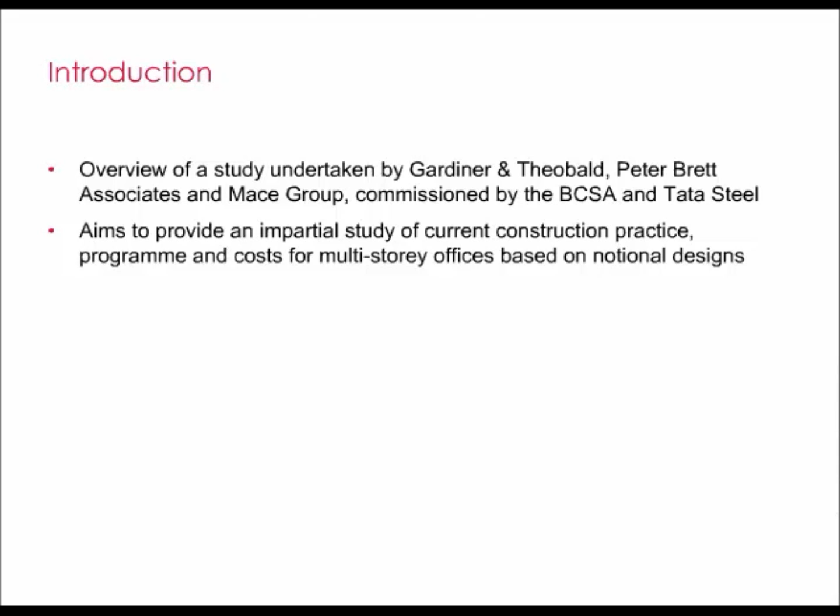Two typical office buildings will be considered: Building 1, a low-rise out-of-town business park office building, and Building 2, an 8-storey city centre office building. We'll go into a bit more detail later on those.

As decisions on frame material and configuration will be based on a number of factors, the structural characteristics, programme and buildability implications of each of the framing options will be considered alongside the cost implications of each. In addition, the cradle-to-grave embodied carbon implications of each of the framing options will also be considered for Building 2 only.

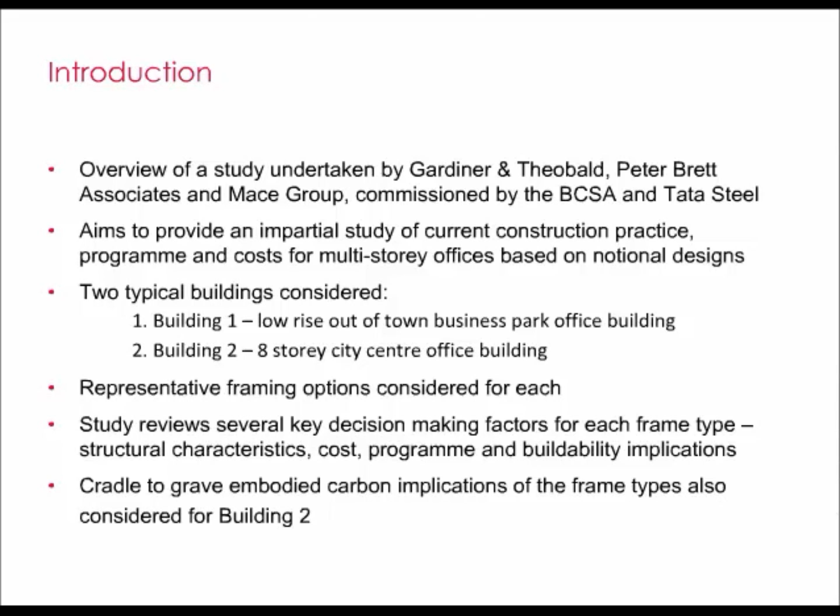The first building we will consider is a typical speculative 3-storey business park office building with a gross internal area of around 3,300 square metres, plus a rooftop plant enclosure. It is representative of a low-rise building in an out-of-town location and is rectangular with a floor plate width of 18 metres to provide open-plan internal space, as shown in the indicative cutaway and architect's impression images.

The clear floor-to-ceiling height has been set at 2.8 metres, and the building contains one central core, 2 lifts, and an external metal escape stair.

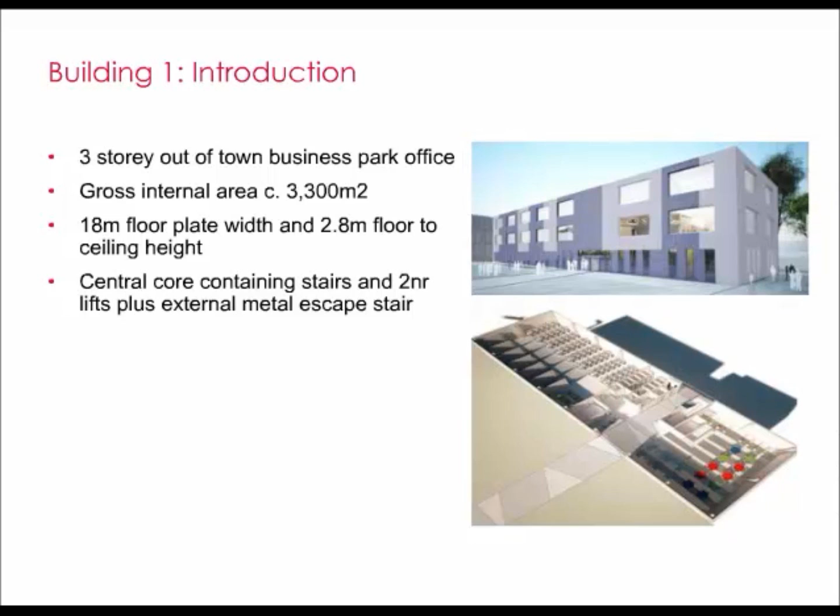The external envelope has been assumed to be brick outer skin construction supported by a steel angle off the slab edge, with an inner leaf of cold-rolled steel metal framing built directly off the slab, with an allowance for windows at 35% of the facade area.

The building has been assumed to have mixed-mode ventilation, and the floor-to-floor heights include for a 150mm ceiling and lighting zone and a 150mm raised floor zone.

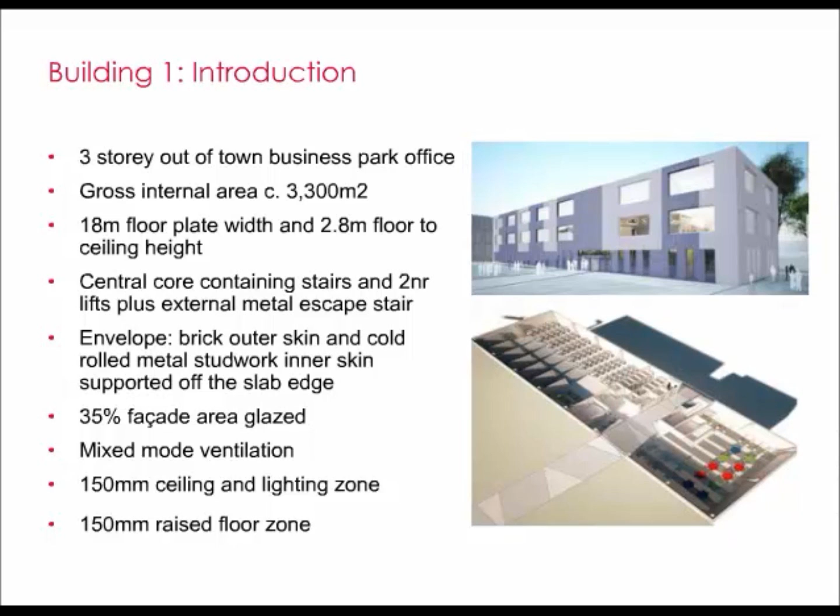As Rachel mentioned previously, the building was designed to represent a typical office that you might find in an out-of-town business park, being 3-storey with an area of 3,300 square metres and overall planned dimensions of 60 metres by 18 metres. We chose to use a design grid of 7.5 metres by 9.

Primarily because it's a common grid in this type of building, and although a 7.5 metre square grid is also common, there's a lot of previous cost data on that grid size which we didn't want to replicate here. That grid size also lends itself to open plan office layouts.

It provides good natural lighting and also helps to achieve natural ventilation, although it is on the upper limit for that. As far as structural options were concerned, we chose 4 of the most common options used in office buildings.

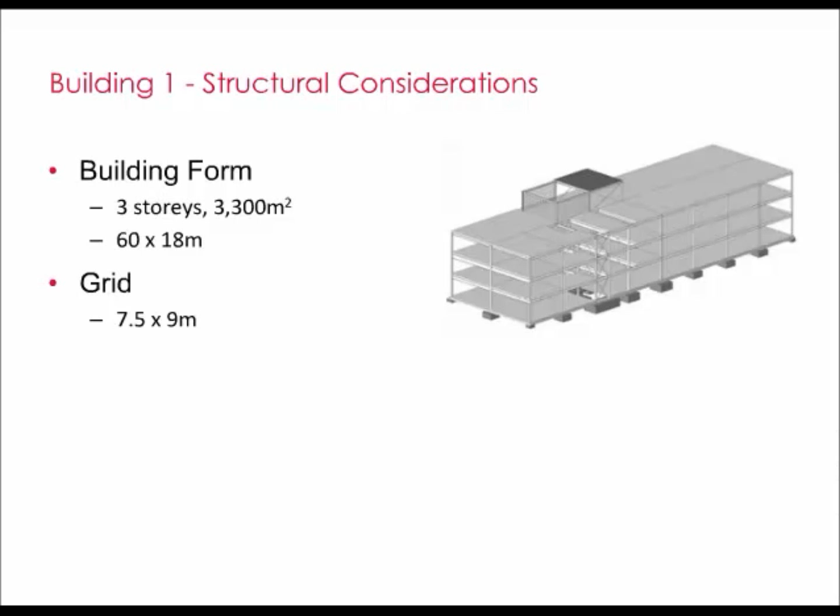These were steel composite beams and composite slab, steel frame with precast slabs. Option 3 was reinforced concrete flat slab, and the 4th option was a post-tension variant of the flat slab.

So these 4 options were taken forward and designed in enough detail to enable costing and programming of the construction.

In terms of loadings, for superimposed dead loads, we assumed a raised floor for power and data distribution, along with suspended ceilings and services, giving a combined superimposed dead load of 0.85 kilonewtons per square metre.

Imposed loads were assumed at 4 kilonewtons per square metre for office areas, with an allowance of 1 for partitions. And although BCO loads are lower at 2.5, many offices still use the higher loading to ensure flexibility of future use.

In terms of stability, core construction was assumed to be steel cross-braced framing with blockwork infill for the steel-framed options, and concrete core walls for the in-situ concrete frames.

Foundations were assumed to be pad footings with a bearing pressure of 200 kilonewtons per square metre, and ground-bearing slabs were assumed throughout. For services, the ventilation system was assumed to be mixed mode, where natural ventilation is supplemented by mechanical ventilation during periods of high or low temperature.

Steelwork solutions assumed a 300mm minimum service depth beneath the beam, and the concrete flat slab options assumed a 600mm clear zone beneath the slab.

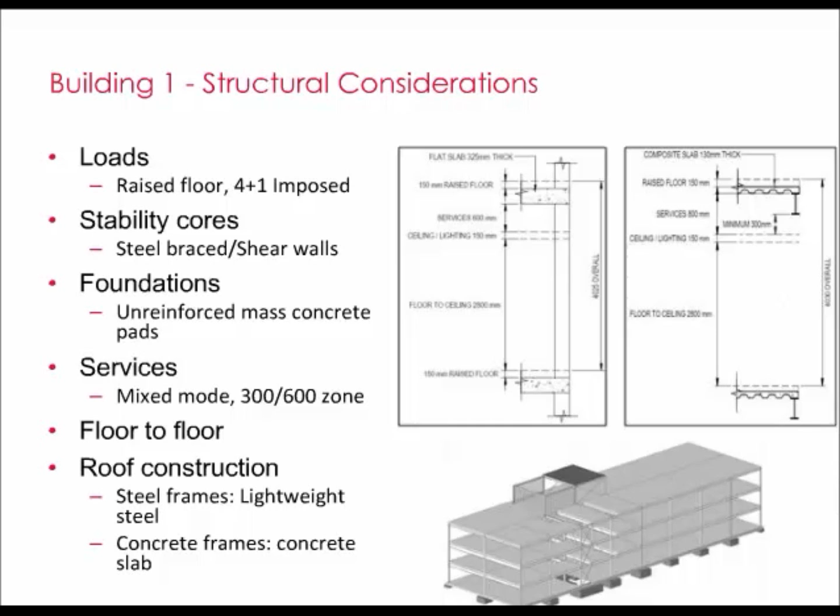In terms of results, I won't go into details of the steel sizes or slab depths, but I'll look instead at the impact on floor-to-floor heights. The steel composite option came in at a floor-to-floor height of 4,030 millimetres, virtually identical to the concrete flat slab at 4,025. The deepest option was steel precast at 4,200 millimetres, and the shallowest by a whisker was the post-tension slab option at 3,950 millimetres.

These depths then set the overall building height and allowed items such as cladding costs to be assessed for each option.

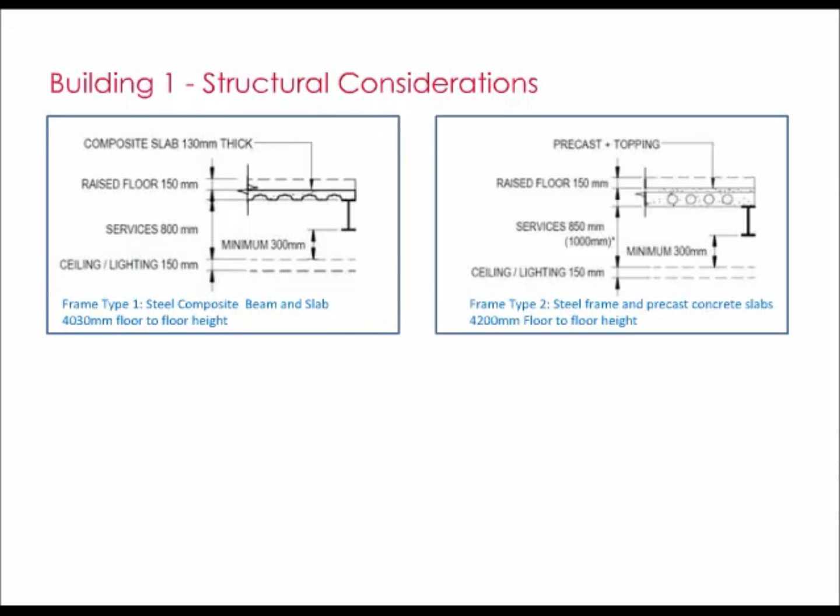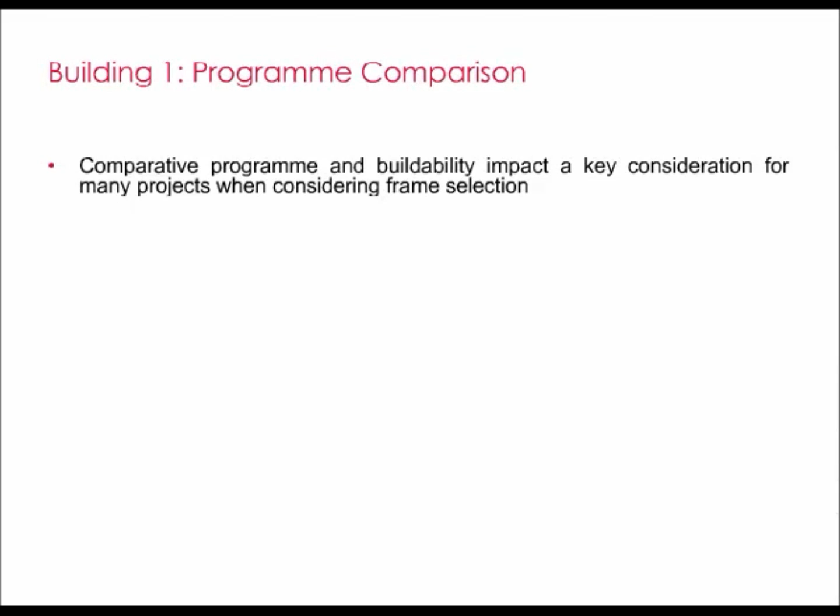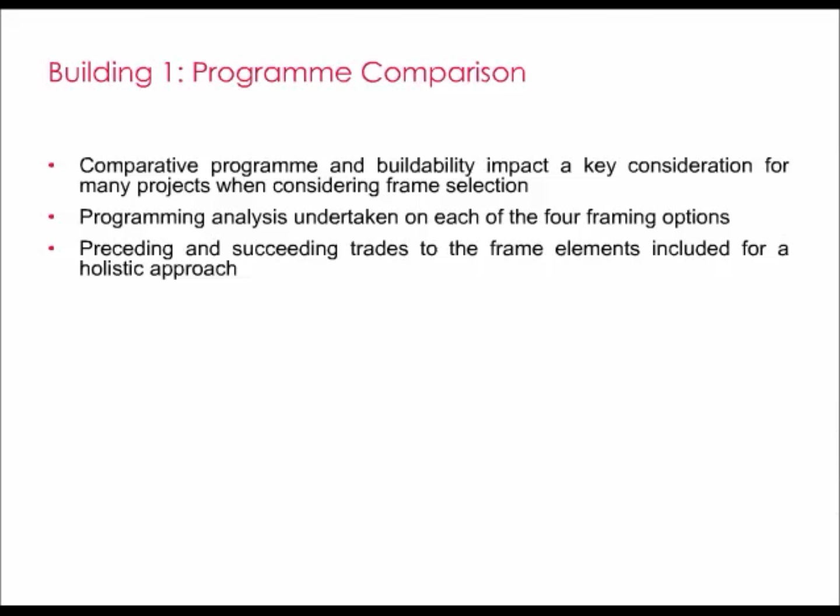Thank you, Fergal. Clearly programme and buildability is an integral part of the comparative study, and we took a holistic approach to programming, keeping as constant as possible all the elements that were common to the complete building construction programme through to completion.

Programme durations, for example for the ground floor slab, 2 weeks 4 days, were kept constant, as were external facade and internal fit-out, which we've based at 18 weeks per floor.

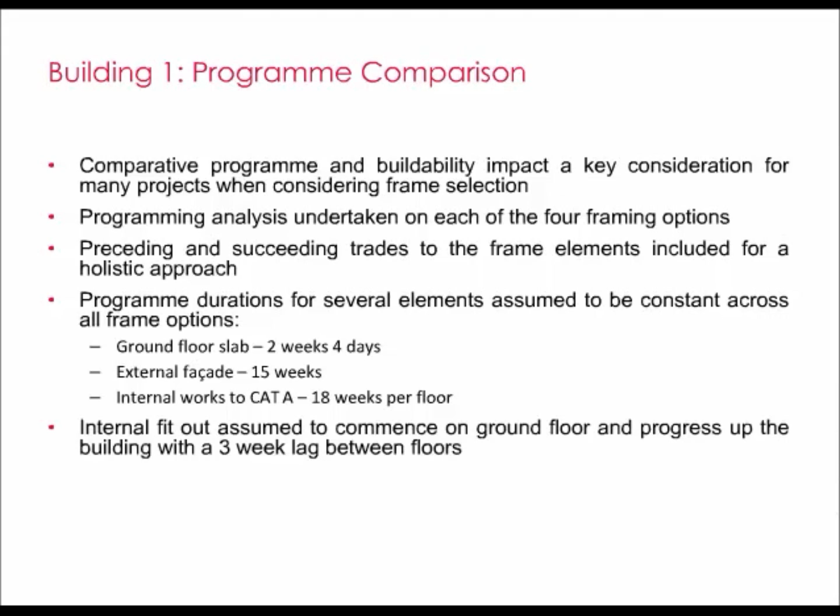The internal fit-out is assumed to commence on the ground floor and progress upwards, and we've assumed a 3-week lag between each floor.

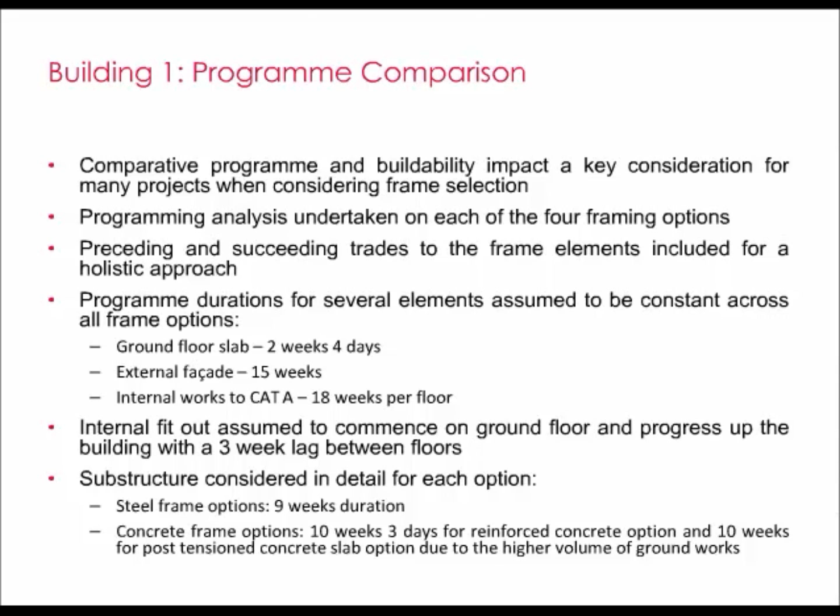The substructure considerations for steel and concrete were 9 weeks for the steel option, and marginally longer for the concrete option because of the higher volume of work from the heavier frame.

In overall terms, here is a programme summary of the 4 options Fergal has just outlined. The steel composite frame was 6 weeks.

These are all working weeks on all programmes. The precast concrete came in at nearly 7 weeks, nearly 9 weeks for the RC traditional, and 8.3 weeks for the PT option.

In overall terms, we have both steel options at around 45 to 46.5 weeks, and about 48 weeks for the concrete options.

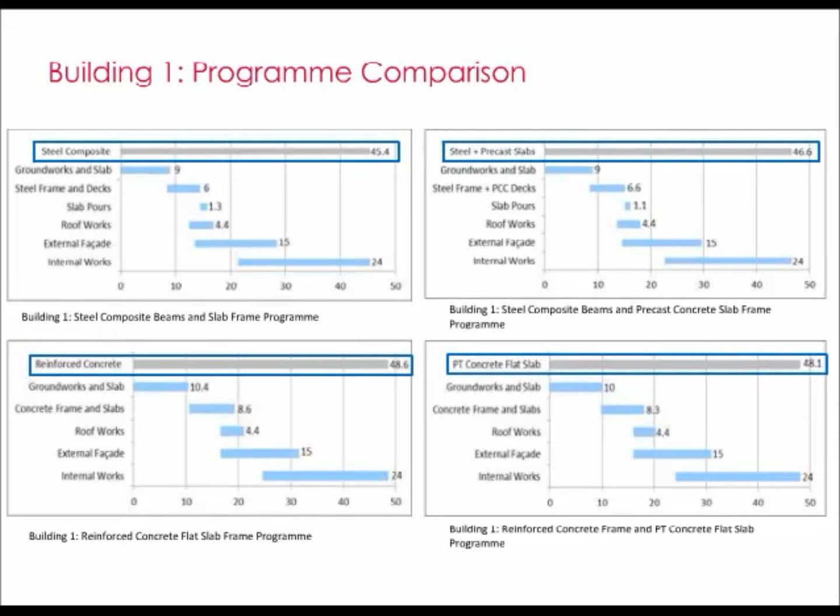Both steel options therefore have similar durations for the substructure, frame and upper floors, with the steel composite having the quickest frame and upper floor duration.

Steel decking is, we found, quicker to load out, so the logistics of loading out the steel is marginally quicker than precast planks. Therefore both steel options have similar overall durations for laying and distributing the steel decks, though the composite is marginally quicker.

The post-tensioning option has a slightly quicker frame and floor duration due to the lower quantity of reinforcement placement within that option, making it marginally quicker on the RC side.

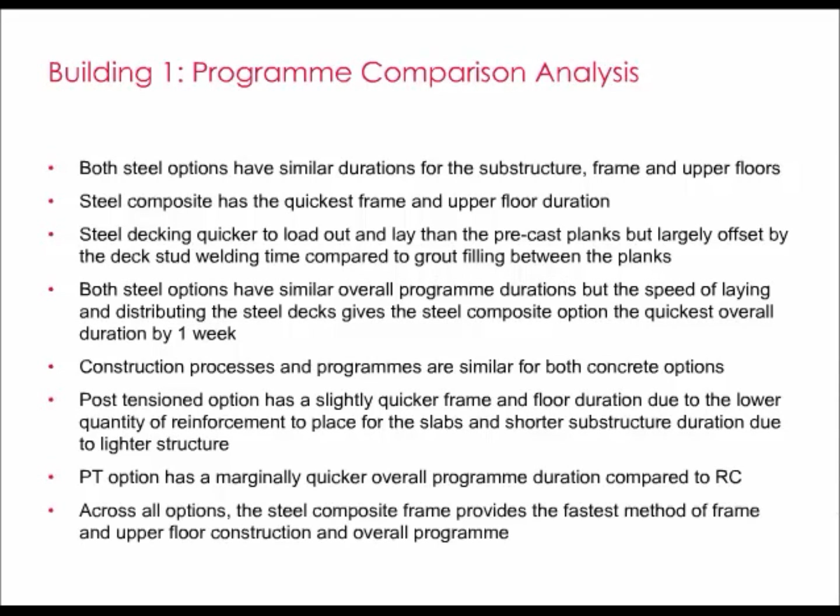Across all options, the steel frame is therefore a slightly faster method for this type of building. In terms of logistics, we...

outline here the steel option, which we've assumed could be built in 4 phases, building each phase to its full height before moving on to the next phase.

The craneage strategy for the steel has been assumed to be a mobile crane, and placement of concrete has generally been by pumping.

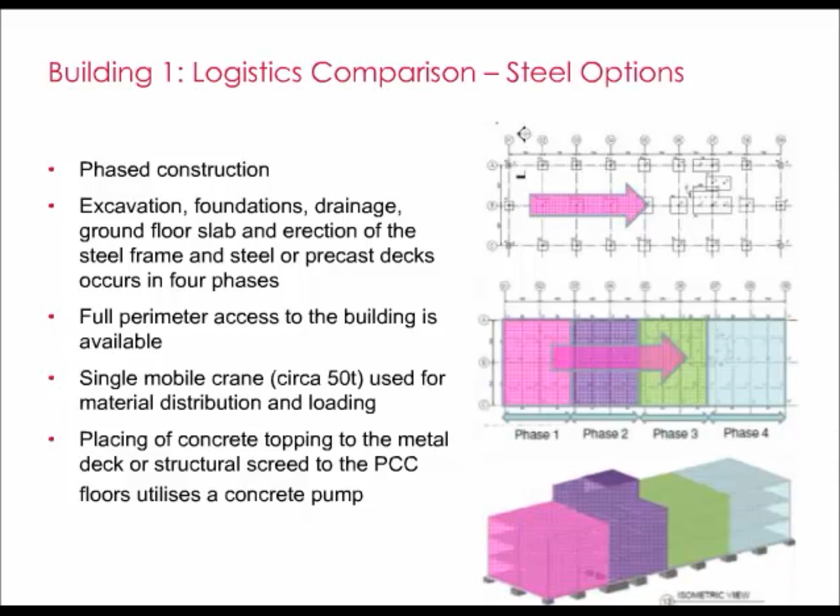For the concrete options, we've looked at a tower crane with a two-zone or two-phase strategy, on a floor-by-floor basis.

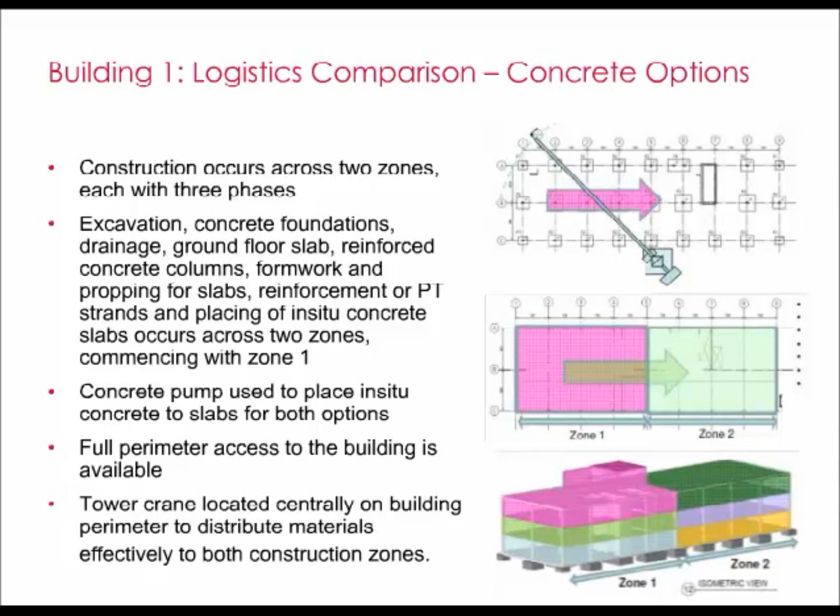So the formwork would go, after being struck from one level, to the same level on the floor above, and the tower crane has been assumed to be a saddle tower crane, assuming there are no oversailing issues. And now I'm going to hand you back to Rachel.

Gardiner and Theobald prepared estimated costs for the study, based on market testing and recently tendered projects. All costs in this presentation are at fourth quarter 2013 prices and based on construction in the City of London, though they can be adjusted for different locations using BCIS location factors.

Fees, VAT, project contingency, FF&E and AV allowances, Section 106 and 278 costs, and so on are excluded from the study. The study recognises the importance of considering all elements of total building cost, not simply the cost of the structural frame, as some elements are affected more by frame choice than others.

In particular, substructure, which is affected by the structural layout and weight of the frame; the roof, the construction and configuration of which may change depending on the frame choice; and the external envelope, the area of which will vary depending upon the achievable floor-to-floor height, along with all other vertical components of the building.

To make sure these variables were fully captured, the study considered whole building cost rather than just structural frame cost, and the substructure, roof, and external cladding costs were assessed for each option rather than including constants.

Some items were, however, assumed to be constant across all options, as they were not considered to be affected by frame material or configuration, including stairs, internal fit-out and finishes, and mechanical and electrical services.

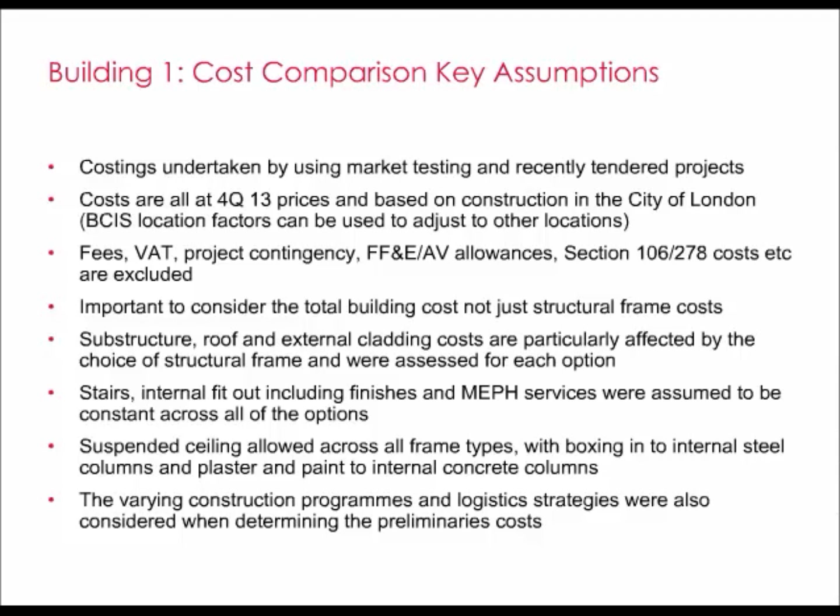Looking at just the frame and upper floor costs of each of the options to start with, it is clear that there is a significant variance in cost across the different frame options. The steel composite beam and slab option has the lowest cost, at £140 a metre squared gross internal floor area, with the cost of the other 3 framing options ranging from £150 to £153 a metre squared.

A review of the impact of frame selection on the substructure costs also shows that the steel composite beam and slab option has the lowest substructure cost at £52 a metre squared, followed by the steel and precast concrete option, the post-tension concrete flat slab option, and finally the reinforced concrete flat slab option at £67 a metre squared.

The impact of the construction programme and logistics strategy for each option also impacts on the preliminaries costs for each frame type, with the 2 steel framing options benefiting from lower preliminaries costs due to their shorter construction programmes.

Overall, the steel composite beam and slab option has the lowest total building cost at £1,535 a metre squared gross internal floor area, followed by the steel and precast concrete slab option. Post-tension concrete flat slab option and the reinforced concrete flat slab has the highest overall cost at £1,628 a metre squared.

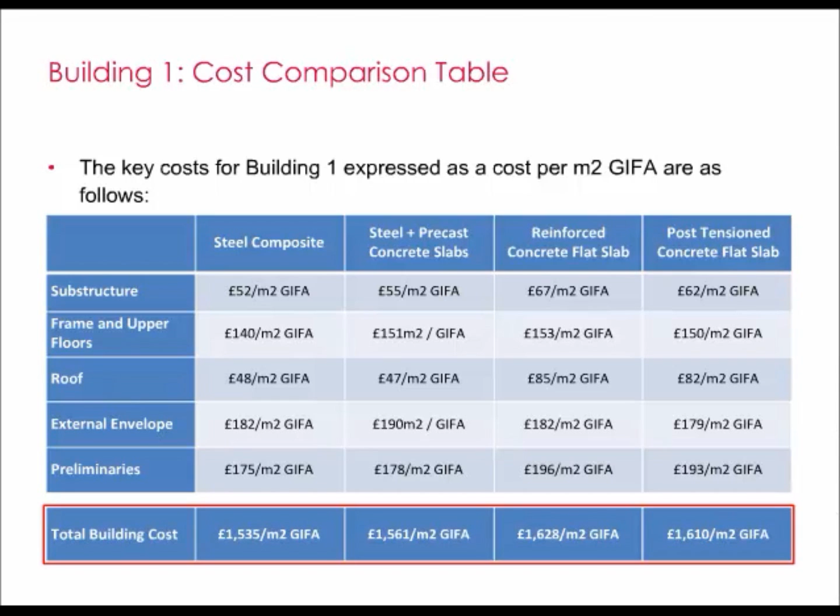As noted, the steel composite beam and slab option has both the lowest frame and upper floors cost and the lowest total building cost. It also has the lowest substructure cost of all Building 1 frame options due to the lighter frame weight, lowest preliminaries costs due to the shortest construction programme, and also benefits from low roof costs due to the use of a lightweight steel roof deck.

While the structural zone and floor-to-floor height for this option of 4.03 metres was not the lowest of all the options, it does not result in elevated cladding costs, as only the concrete post-tension flat slab option has a notably lower floor-to-floor height and therefore reduced area of cladding.

The steel frame and precast concrete slab option has the second lowest total building cost. While it has the highest external envelope cost due to the highest floor-to-floor height of 4.2 metres, of all the frame options considered for Building 1, it benefits from low substructural costs due to the light frame weight, the lowest roof costs due to the use of a lightweight steel roof deck, and has the second quickest construction programme, which has resulted in reduced preliminaries costs.

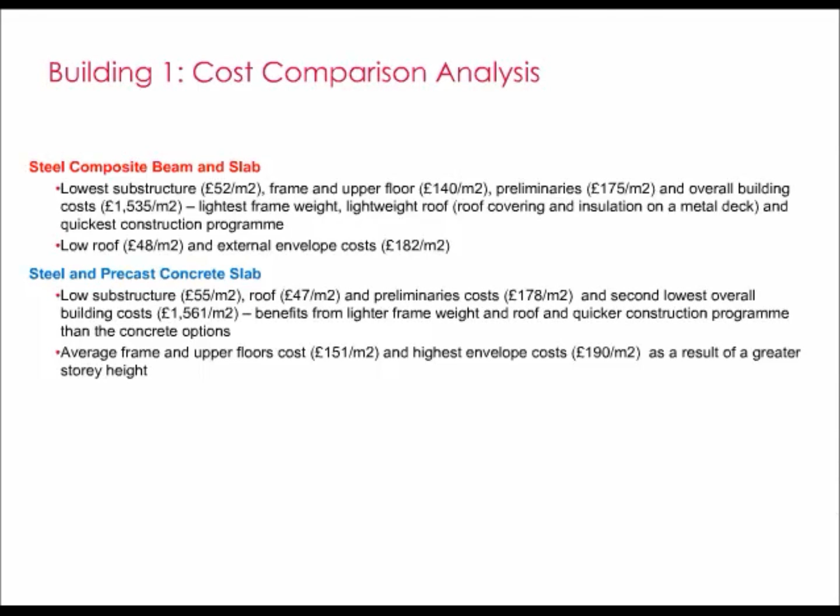Conversely, the reinforced concrete flat slab option has both the highest frame and upper floors costs and highest overall building cost. It has the highest substructure costs of all Building 1 frame options due to the heavier frame weight, the highest preliminaries costs due to the longest construction programme, and also has higher roof costs than the steel options as the concrete slab construction continues throughout.

The frame and floors cost is circa 10% higher than the steel composite option, and the total building cost is circa 6% higher.

The post-tensioned concrete flat slab option benefits from the lowest floor-to-floor height of 3.95 metres, which results in it having the lowest external envelope costs. However, the heavier frame weight compared to the steel options means that it has higher substructure costs, and the longer programme also impacts on the preliminaries costs. This option also has higher roof costs than the steel options as the post-tension concrete slab construction continues throughout.

Therefore, while this option has the second lowest frame and floor cost, it has the second highest overall building cost due to the impact of the frame on the associated building elements and programme.

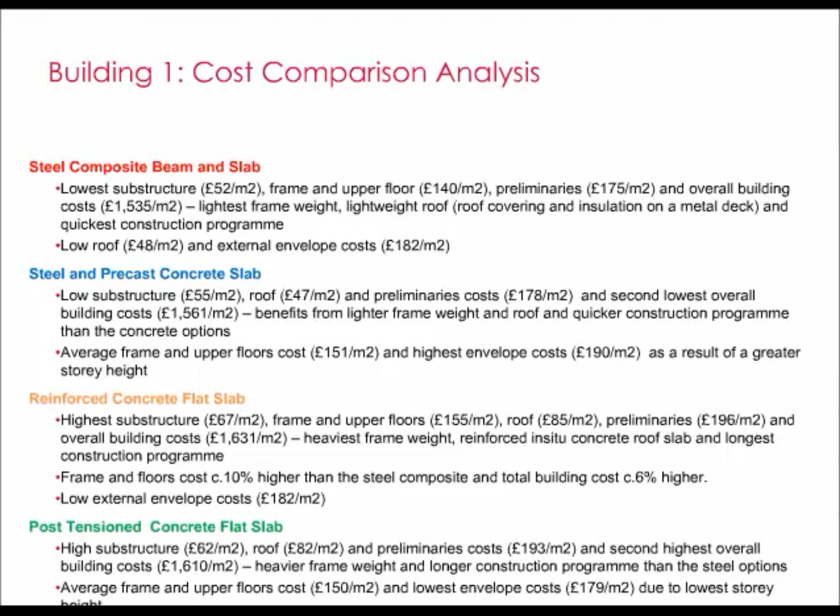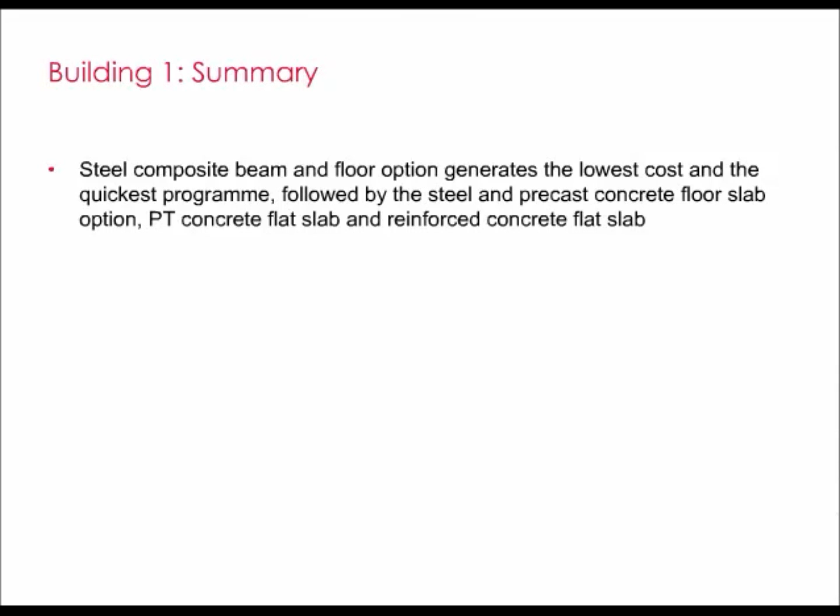So in summary, the analysis of all four frame options for Building 1 has shown that the steel composite beam and floor option generates both the lowest cost and the quickest programme. This is followed by the steel and precast concrete floor slab option, and then the post-tension concrete flat slab, with the reinforced concrete flat slab option having both the highest cost and longest construction programme.

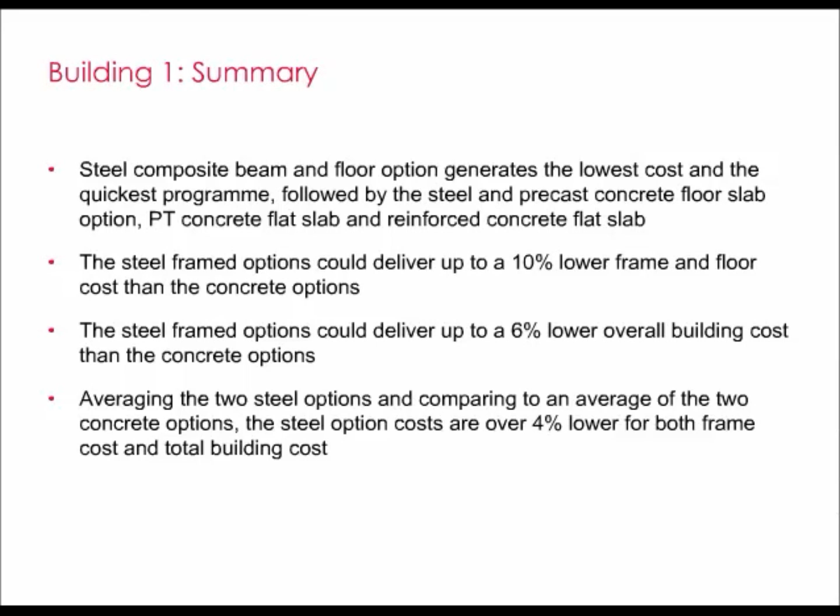The frame and floors for the steel-framed options could deliver up to a 10% lower cost than the other options, and the steel-framed options could deliver up to a 6% lower overall building cost. Looking at an average of the cost of the two steel options compared to an average of the two concrete options, the steel options are over 4% lower for both frame cost and total building cost compared to the concrete average. Furthermore, both steel-framed options can also be constructed in a shorter time, on average over 5% quicker.

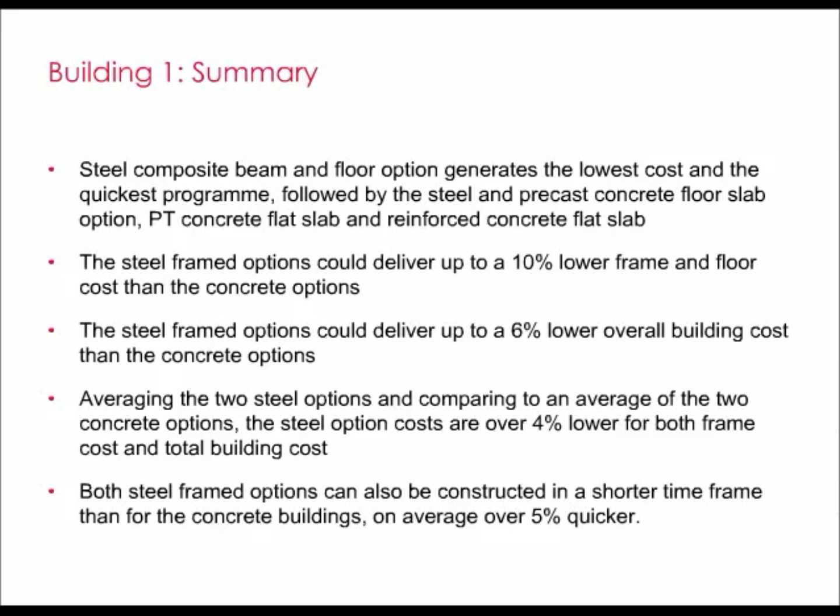So we will now move on to look at Building 2, which is a typical speculative 8-storey city centre office building with a gross internal area of around 16,500 metres squared and a 3-metre clear floor-to-ceiling height. It is L-shaped with a double-height reception area, central core and internal secondary escape stair, as shown on the indicative cutaway and architect's impression images.

The external envelope is a unitised curtain walling system constructed in storey height panels 1.5 metres wide with feature fins and solar control. The solid areas are lined with cold rolled metal studwork, insulation and plasterboard. The building has been assumed to have 4 pipe fan coil air conditioning and mechanical ventilation, and allowances have been made within the floor-to-floor height for a 150mm ceiling and lighting zone and a 200mm raised floor zone.

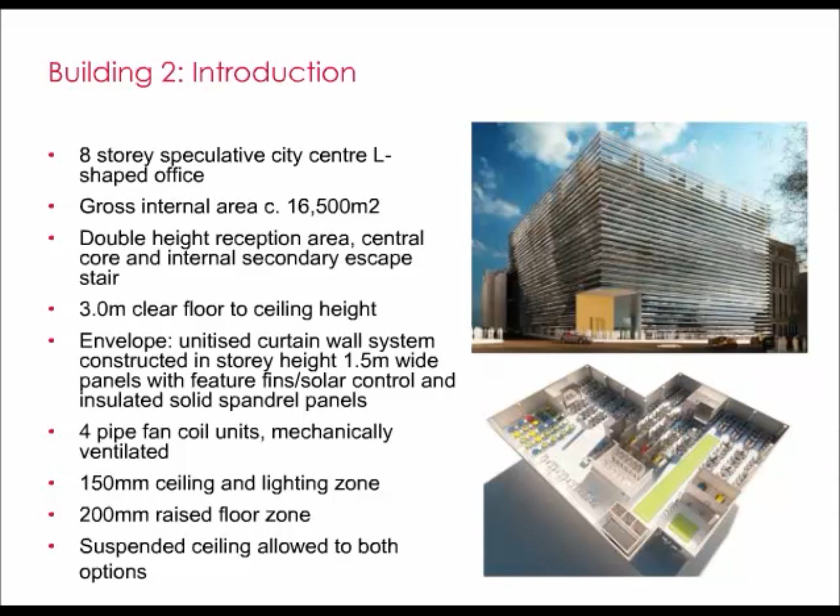So on the structural side, this building was designed to represent a typical city centre office that you might find in central London. It had overall dimensions of 52 metres by 45 on an L-shaped plan footprint. And in both options, we had also assumed that they included a basement, but this was assumed to be identical for both options and wasn't designed in detail.

Again, the grid was the subject of much study and was set at 7.5 by 15 metres, but maintaining a 7.5 metre column spacing along the perimeter at all times. A 9 by 15 metre grid was also considered, but we felt that the 7.5 metre grid gave a more efficient configuration of half grids at the corners of the building, where a 9 metre grid would prove awkward.

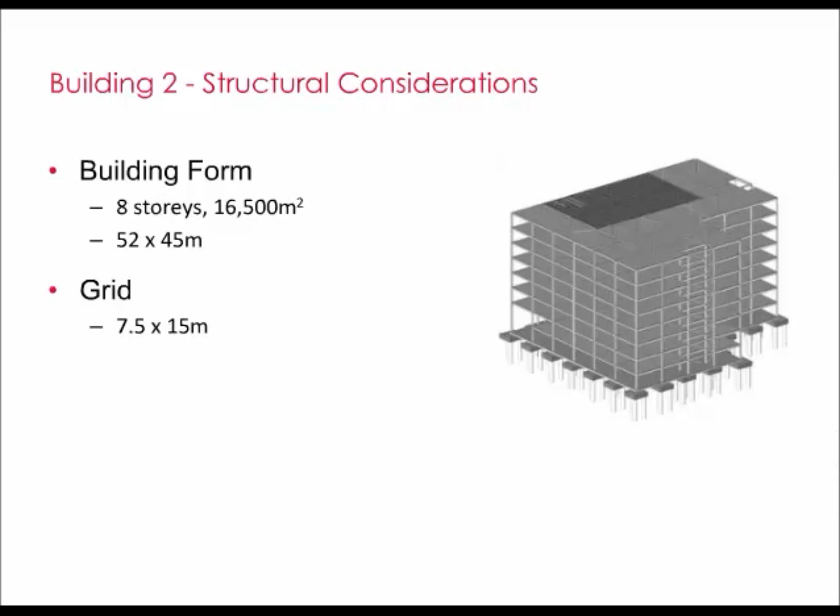The 7.5 metre grid also coordinates better with car parking bays, as these are to be incorporated into the ground floor or basement of an office building. As far as structural options were concerned, again we chose 2 of the most common options used in office buildings. Option 1 was composite cellform beams supporting a composite slab, and option 2 was a post-tension system consisting of downstand band beams supporting one-way spanning post-tension slab. So again, these options were taken forward and designed in enough detail to enable costing and programming of the construction.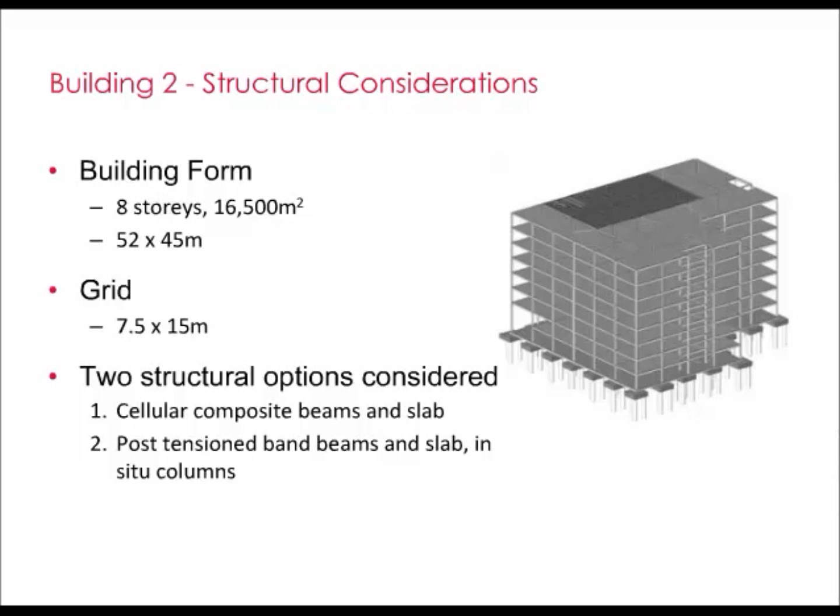Again, looking at loadings, we assumed a 200mm raised floor for power and data distribution, along with suspended ceilings and services, giving a combined superimposed dead load of 0.85 kilonewtons per square metre, and imposed loads were again assumed at 4+1 allowance for partitions. Core construction was assumed to be steel cross-brace framing with blockwork infill for the steel-framed option and concrete core walls for the in-situ concrete frame.

Bearing strata, as you can imagine in London with the basement, was assumed to be London clay, and the foundation type was typically CFA piles with 3 to 4 piles per typical column pile cap. The ventilation system was assumed to be conventional fan coil air conditioning with no natural ventilation. The ventilation zone for the concrete option was provided in a 400 deep zone beneath the concrete band beam, and for the cellform option it was an integrated zone with 400mm diameter holes at 600 centres in the cellform beams. The floor to ceiling height for this building was set at 3 metres, with the floor zone then determining the final floor to floor height for each option.

Because most of the roof area was given over to plant room, the steel framed options retained the same composite deck at roof level, and the PT band beams and slabs were also retained at roof level. Plant areas were then partially enclosed by a steel frame structure.

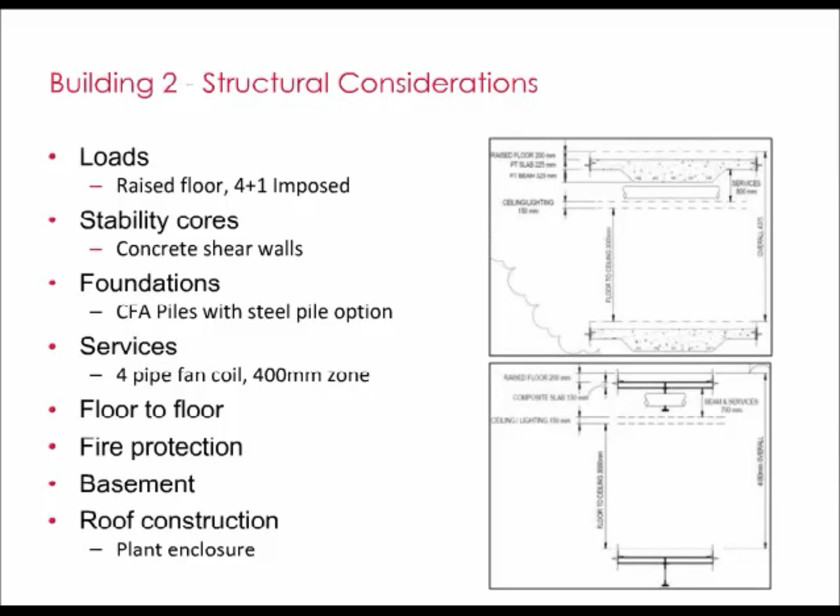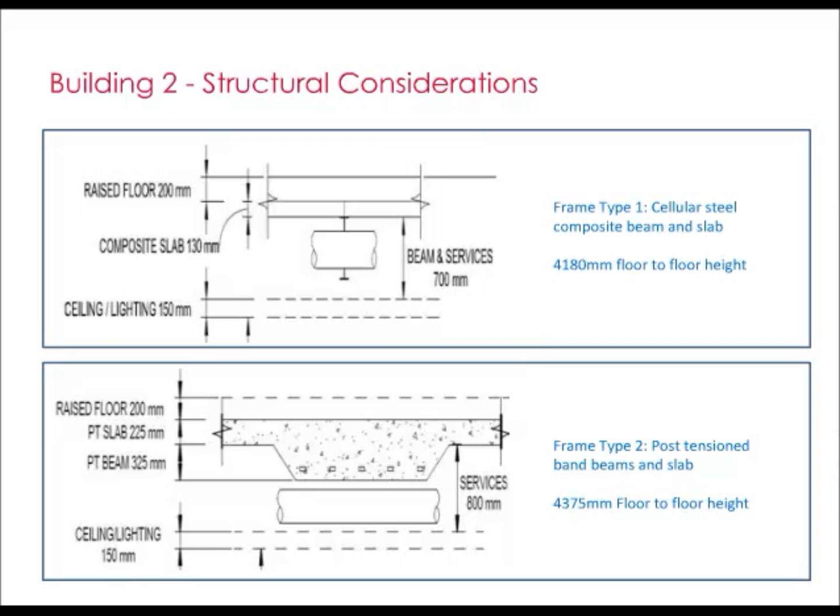Again, in terms of results, we won't go into details of the steel or concrete sizes, but I'll look instead at the impact on floor-to-floor heights. The steel cellform option with integrated services came in with a floor-to-floor height of 4,180 millimetres. The post-tension solution with services below the band beams came in at 4,375 millimetres. So the integration of the service zone created a saving of around 200 millimetres per floor for the steel option. These steps then set the overall building height and allowed items such as cladding costs to be assessed for each option.

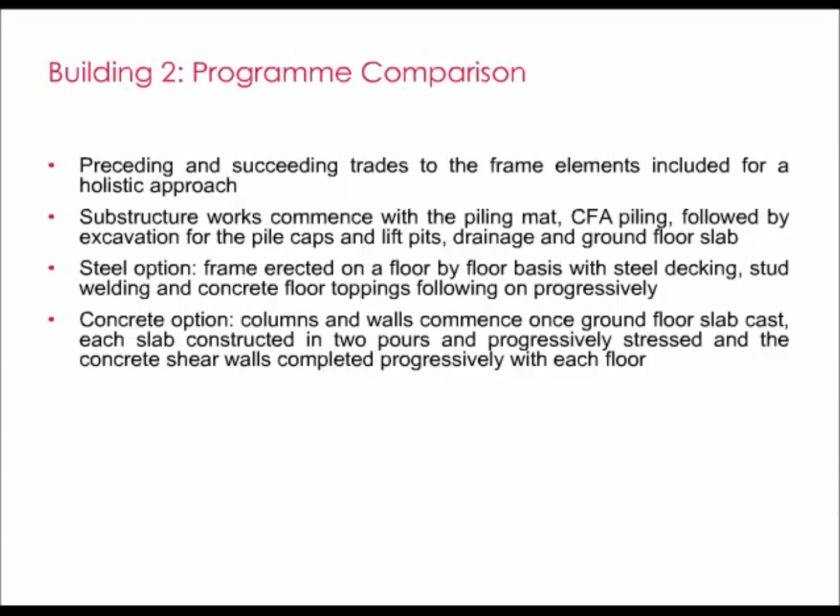In terms of programming for Building 2, we've used the same methodology for analysis as per Building 1, with all common elements kept constant throughout. Substructure works are assumed to commence with a piling mat, followed by piling and then excavation. Both the steel and concrete options are assumed to be built on a floor-by-floor basis rather than partially all the way up the building, which is more common for a building of this geometry and size.

The program's common durations are for the floor slab, which typically is 4 weeks 3 days, and once again the cladding and internal fit-out, which is longer but more aggressive in terms of overlap for all of the options.

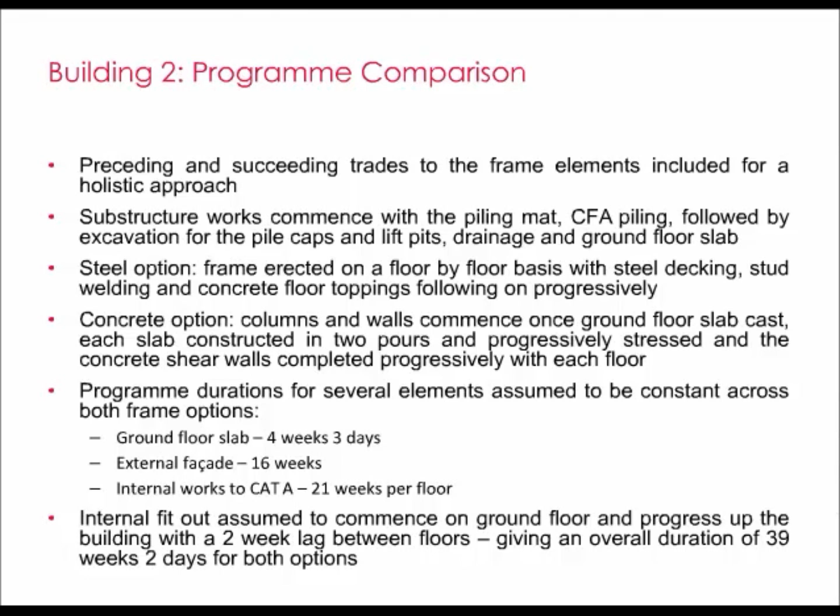The comparison between the two systems shows the steel frame and decks option is just under 17 weeks, and the concrete frame and slabs for the PT option is just over 28 weeks. Overall, the difference is much more pronounced because of the size of the building: about 72 weeks for the cellular option and 80 weeks for the PT option.

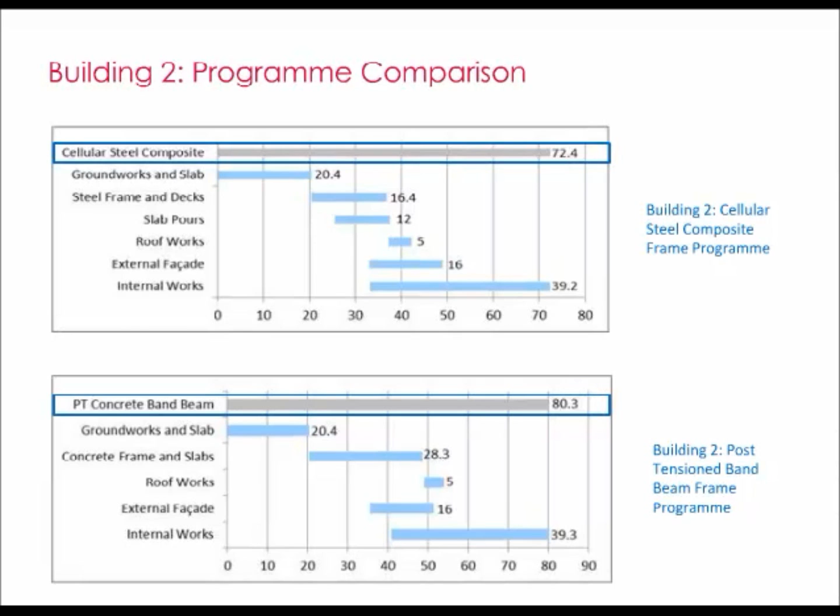The steel frame option has a significantly shorter frame and floor construction period than the PT band beam option - 16 weeks compared to approximately 28 weeks for concrete. This enables succeeding trades such as roofing works and internal fit-out to commence earlier. Overall, the steel option demonstrates about a 12-week saving for the frame and 8 weeks overall for the holistic programs.

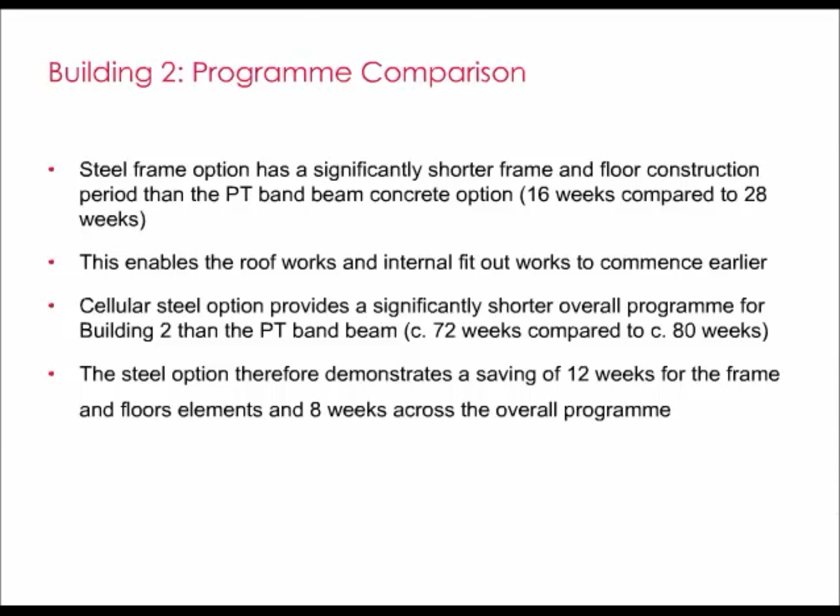In terms of logistics, because of the nature of the building and its possible city centre location, both forms will likely be constructed using a luffing jib tower crane to avoid any oversailing constraints, and the concrete will typically be pumped up to the various floors.

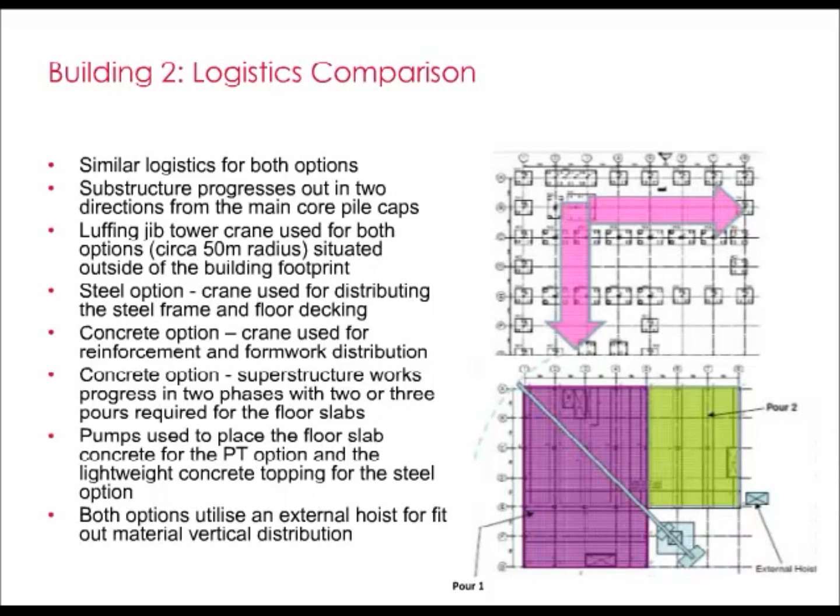In terms of the cost comparison for Building 2, the same principles were adopted as for Building 1, with costs based on market testing and recently tendered projects, all based at fourth quarter 2013 in the City of London. As with Building 1, fees, VAT, project contingency, FF&E, AV, Section 106 and 278 allowances are excluded from the study, and in addition, all costs associated with basement construction are also excluded, as it is assumed this would be constant across all options.

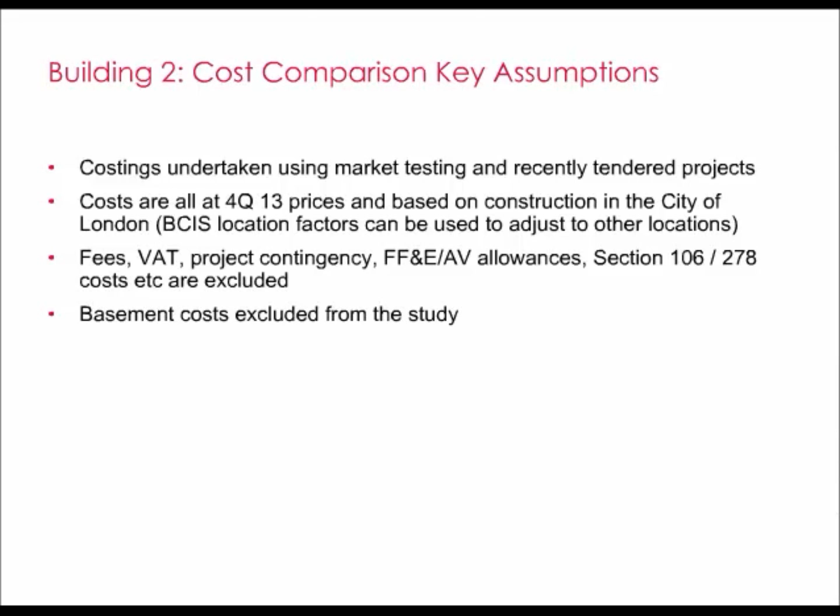To ensure the study captures all implications of the frame choice, the costs of the substructure, roof, external envelope, preliminaries and logistics strategies were individually assessed for each option alongside the differing frame and floor options. As with Building 1, elements not considered to be affected by the frame material or configuration were assumed constant across both options, including the stairs, internal fit-out and finishes, and the mechanical and electrical services.

It was assumed that a suspended ceiling is required across both frame types, with boxing in to internal steel columns and plaster and paint to internal concrete columns included.

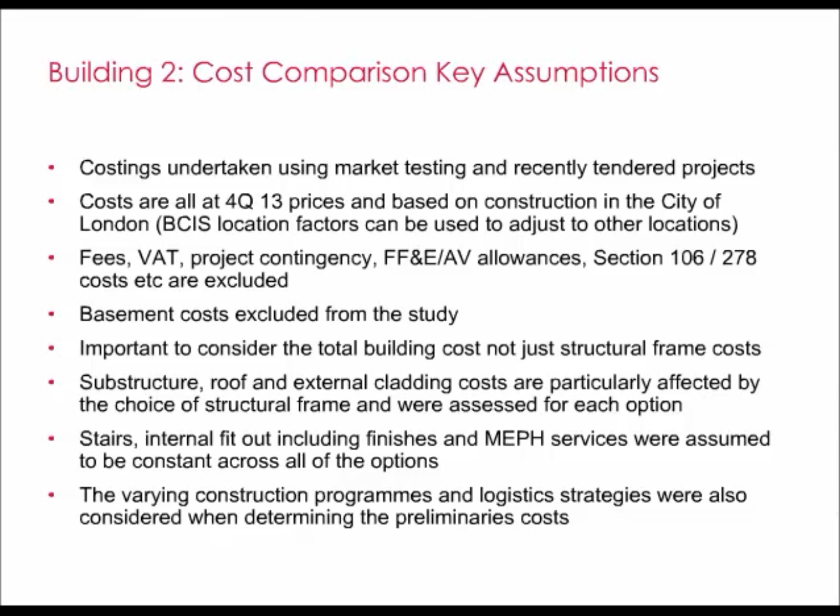This slide sets out the key costs for the two frame options considered for Building 2, all expressed as a cost per metre squared of gross internal floor area.

Looking at just the frame and upper floor costs, the cellular steel composite option has a cost of £194 per metre squared compared to £210 for the post-tensioned concrete band beam option, a difference of around 8%. The cellular steel composite option also has lower substructure costs due to the lighter frame weight and reduced volume of foundations.

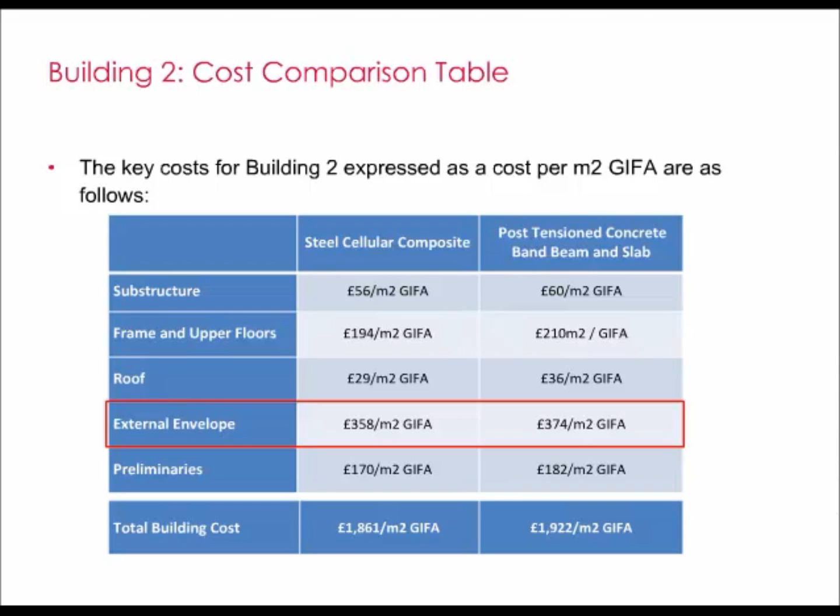The cellular steel option also benefits from a lower floor-to-floor height of 4.18 metres compared to 4.375 metres for the post-tension band beam option, which has resulted in a circa 5% lower external envelope cost due to the reduced area of cladding. The shorter construction programme for the steel option is also reflected in reduced preliminaries costs.

Overall, the steel cellular composite beam and slab option has the lower total building cost at £1,861 per metre squared compared to £1,922 per metre squared for the post-tensioned concrete band beam option.

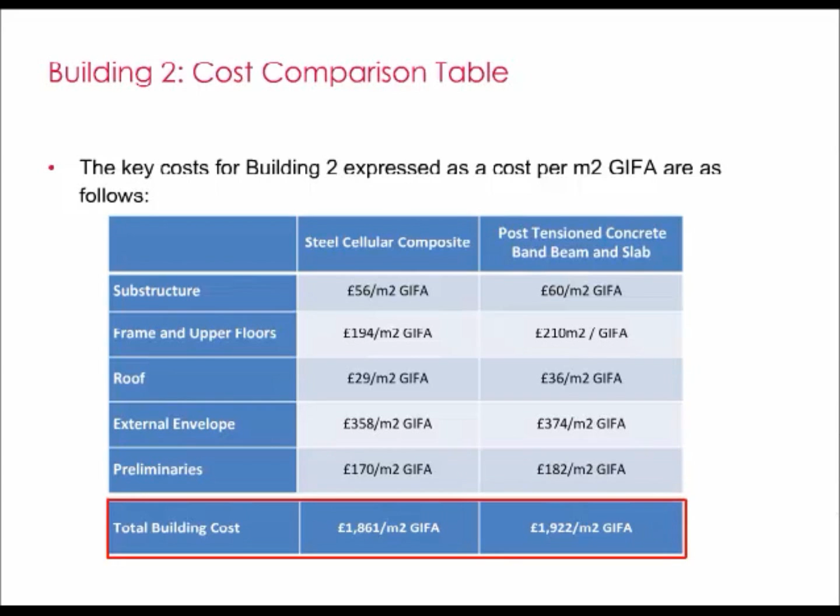To summarise, the cellular steel composite option delivers both a lower frame and floor cost and a lower total building cost than the post-tensioned concrete band beam option.

The steel option benefits from lower substructure costs due to a lighter frame weight, lower roof costs due to the cost of the steel deck compared to the post-tension slab, and from a lower external envelope cost due to the lower floor-to-floor height. It also benefits from reduced preliminaries costs due to its shorter programme.

Overall, the frame and floor cost of the steel option is over 8% lower than the concrete option and over 3% lower on a whole building basis.

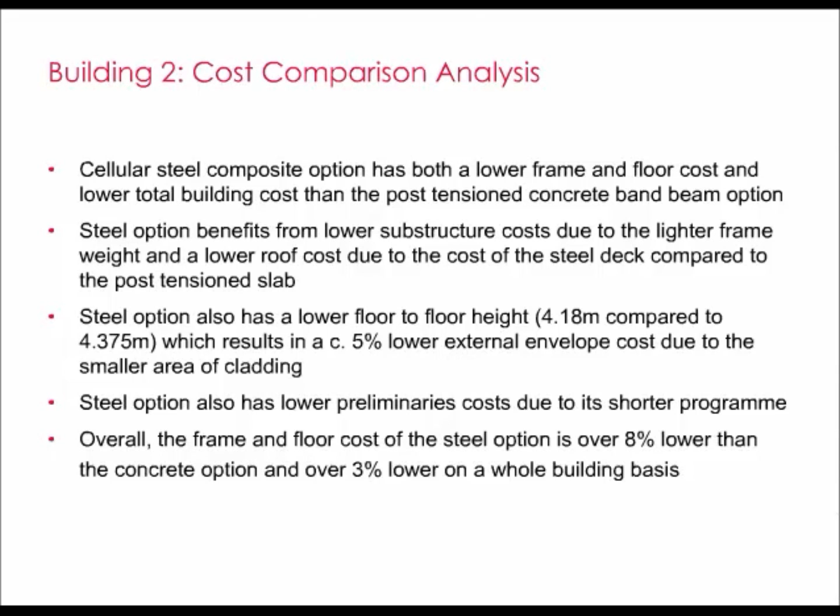So as part of the study, we also looked at the embodied carbon of the structural materials. To put that into context, construction creates around 10% of CO2 emissions in the UK, and the operation of buildings, that's operational, creates about 50% of CO2 emissions. With the ever tighter energy requirements in buildings due to Part L, embodied carbon is now the major component of those emissions for many buildings.

So we now look at the embodied carbon on many projects, and we did so for this cost study as well. In terms of carbon factors, we felt that it was reasonable to use values either from the Concrete Centre or from the Target Zero studies, as we felt many consultants would look to these for source data.

We used cradle-to-grave data as consistently as possible, and assuming that 99% of steel sections and 82% of rebar were recycled, and that 100% of concrete was downcycled to provide granular fill material.

For concrete data, we looked at the so-called business-as-usual scenario, using 100% ordinary Portland cement, and also looked at using 30% cement replacement, which gave an appreciable benefit without compromising on programme.

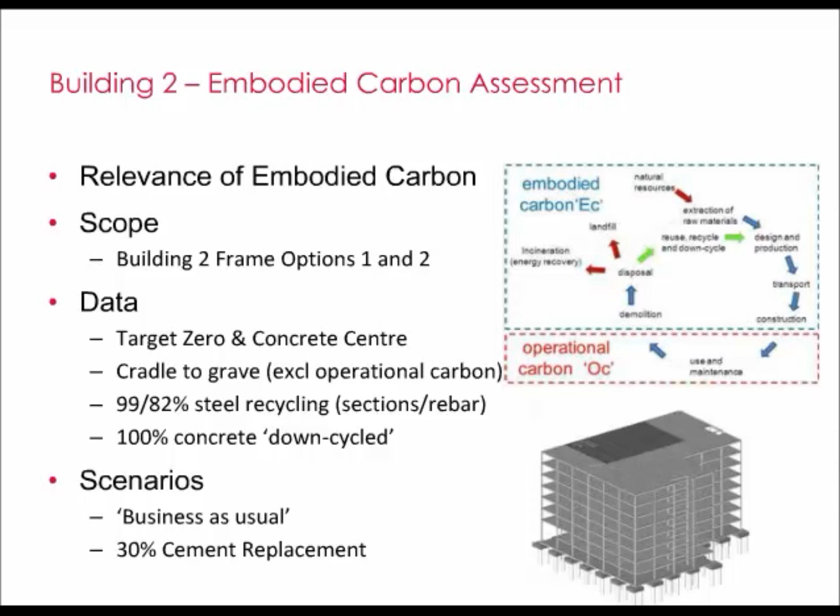In this case, the results showed that the whole life embodied carbon, cradle to grave, was lower for the cellular beam option by around 19% in the base case and around 10% in the cement replacement case. The latter is probably more representative of general practice.

Looking at the spread of all the results, the maximum value for embodied carbon was 253 kg of CO2 per square metre, which reduced to 204 by using cement replacement and was further reduced to 184 by the choice of steel frame option, which is an overall reduction of 27%, which is a very significant amount.

That tonnage of CO2 is often equivalent to 10 to 20 years of renewables contributions to operational energy, and that can often be a good bargaining chip with planners in trying to economise on costly renewables, and we're hoping that this gets wider acknowledgement in regulatory systems such as BREEAM.

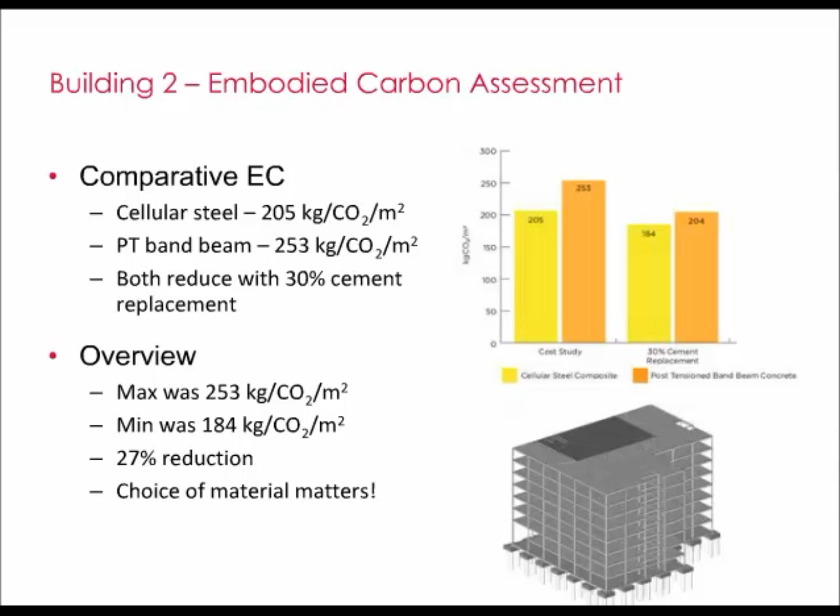So to summarise, the study illustrates that for both building types, on a like-for-like basis, the steel frame solutions are highly competitive, with the frame and upper floor costs for the steel framed options being potentially up to 9% lower than the comparative options. The study has also highlighted the importance of considering total building cost, not just structural frame cost.

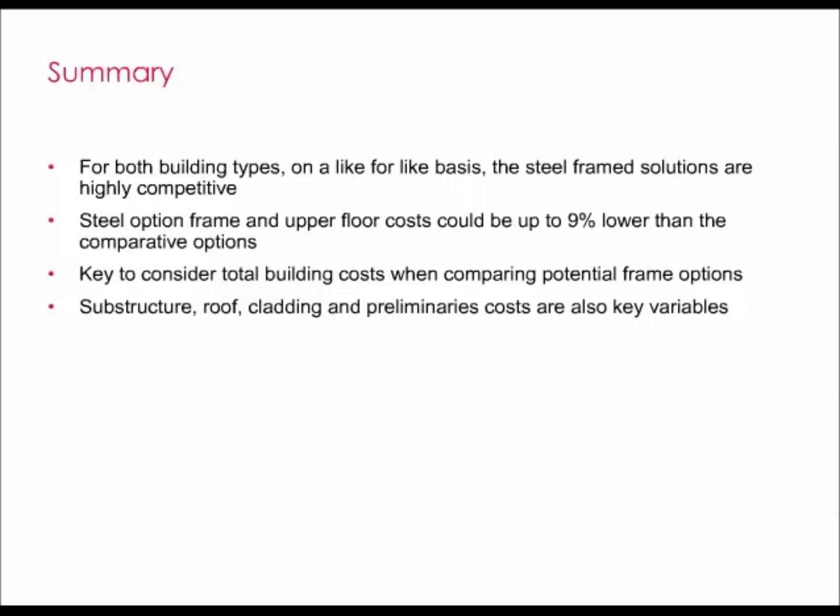As the choice of the structural frame material and configuration will have associated impacts on many other elements, including the substructure, roof and external cladding.

The total building costs for the steel options are on average circa 5% lower than the concrete options as a result of the frame and upper floor costs noted above and smaller foundations, lightweight roofs, lower storey heights, reducing cladding costs and reduced preliminaries costs.

Furthermore, the construction durations of the steel frame solutions are also shorter than the concrete frame buildings, up to 13% for building 1 and circa 11% for building 2.

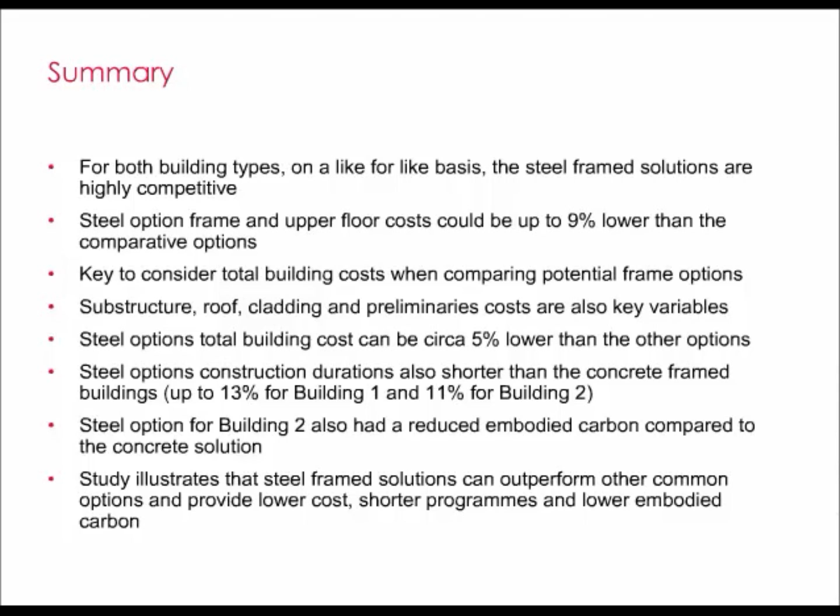The study has illustrated that steel frame solutions can outperform other common options and provide lower cost, shorter programs and lower embodied carbon. Well, that concludes today's webinar, with the exception of the last slide, which provides some useful links for further information.